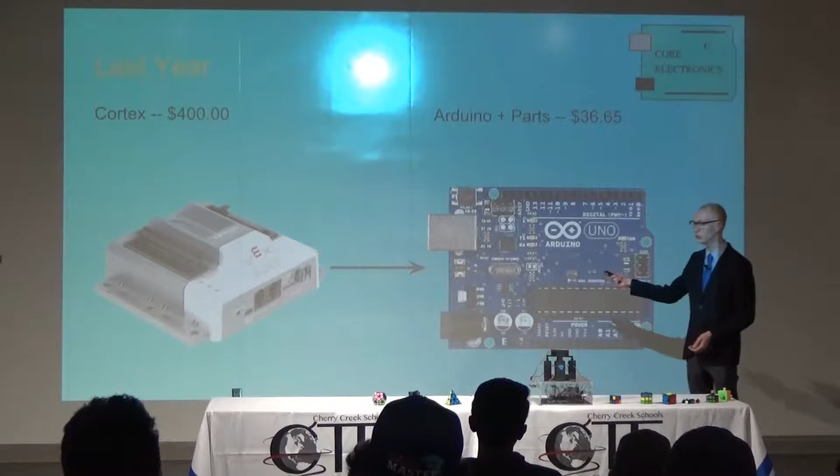But the problem with this part is it's $400, which, as you can imagine, gets quite costly very, very quickly. So what I did instead was I took this part called an Arduino Uno, which is a developer board. It's basically a tiny computer that you can use for prototyping. And this and all the parts you need came out to be around $36, so you can make just over 10 of these for the same amount of cost as it would take to buy one.

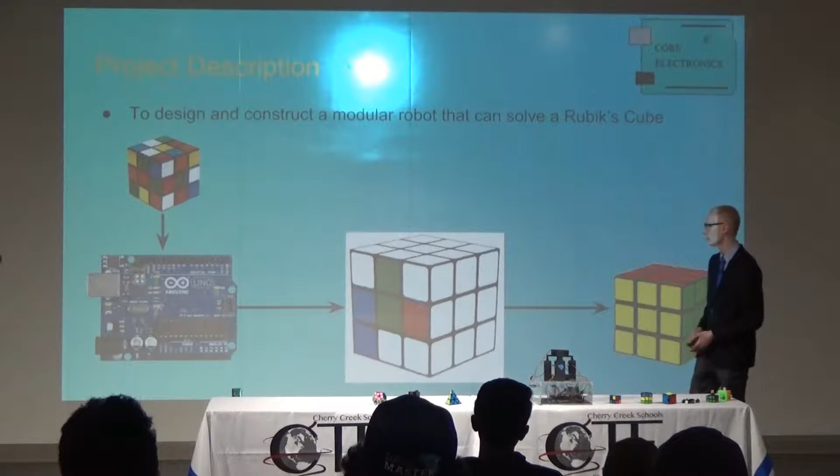My project this year is same sort of thing. I'm still dealing with robotics. What I'm doing this year is I'm taking a robot and giving it the capability to solve a Rubik's Cube, and the result is what you see before you on this table. The way this works is you take a scrambled cube, you put it into my program, it tells motors to spin the faces, and the finished product should be a solved Rubik's Cube.

What I wanted to get out of this was I wanted to keep working on my portfolio, try and get better background, something I can present and say, this is what I've done, this is who I am, you should hire me. I wanted to expand my knowledge of C# programming. C# is just a language in programming, a way to tell the computer base instructions of, okay, take this, now here's what I want you to do with it.

I wanted to be able to design in SolidWorks, and SolidWorks, as you might know, is a 3D CAD program, which I've never touched because I've been on the computer science side, so I wanted to get some experience in that. Along with that, I wanted to get a CSWP, which is Certified SolidWorks Professional. Sadly, I ran out of time and didn't get to take the test for this certification.

I wanted to be able to 3D print custom parts, and that means I can take any idea I have in my head, design it in SolidWorks, and then send it to a 3D printer and actually make it, which seems pretty straightforward, but I'll explain later on in my project. I did run into a few snag-ups with that.

And then the last thing, I wanted to create a robot that can autonomously solve a Rubik's Cube, which I made it so that it can solve a Rubik's Cube, but I ran out of time to add the functionality to make it fully autonomous, which means you just set the cube in there, hit go, and it can do everything. For my project, you still have to give it a couple guidelines along the way.

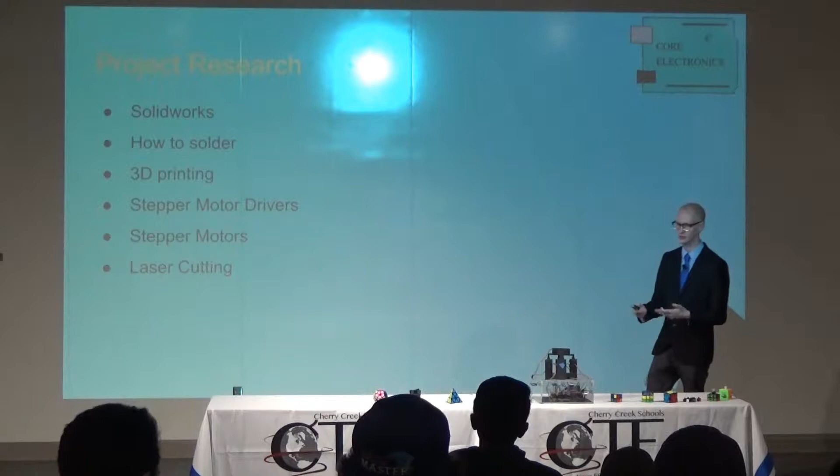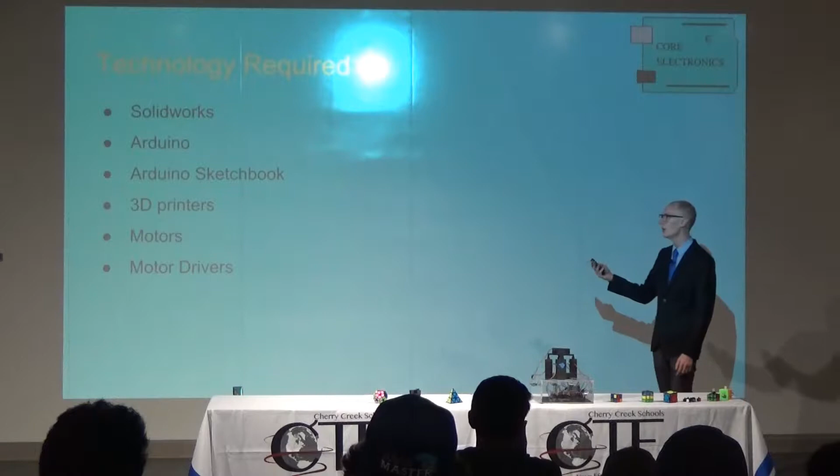And then laser cutting, I've never touched the laser before, so I had to research CorelDRAW and then just learn about the process of actually cutting the material, which I used for the acrylic box that the wiring is housed in. For this, I used SolidWorks, and Arduino Sketchbook. Arduino Sketchbook is the developer environment. It's where you go in to type the actual code on the computer and send it to the Arduino, which is the computer I'm using.

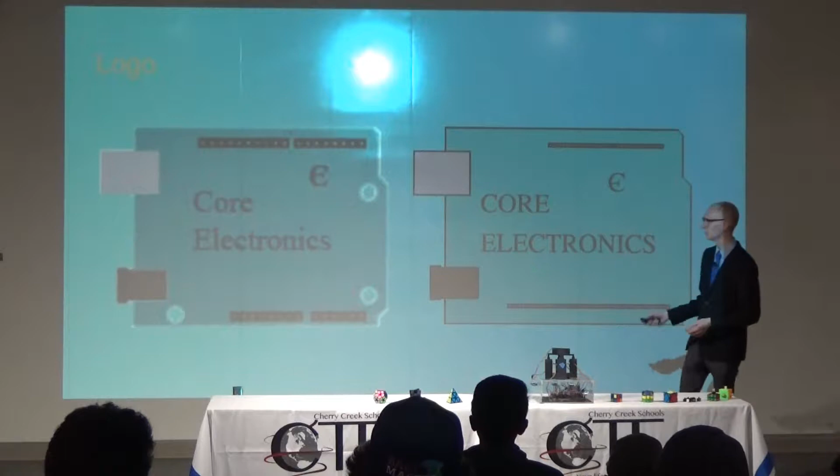3D printers, as I've said before, and motors and motor drivers as well. For our projects, we all made pseudo companies. So my company is called Core Electronics. I have a couple different logos. The one on the left is what I used last year. It's sort of low resolution, so I just beefed it up a little bit on the right, and this is what I've been using so far this year.

Overseeing all of this, I have Brian Hong, who's sitting over here. Thank you for overseeing my project. He's overseeing the code and the hardware parts of my project. He used to teach at Oberlin, and then from there he transitioned to SparkFun, where he worked with educators developing easy ways for students to learn. And then from there he moved to where he works now. He's back in the classroom and he works at Powell High School, which is a technology-driven high school.

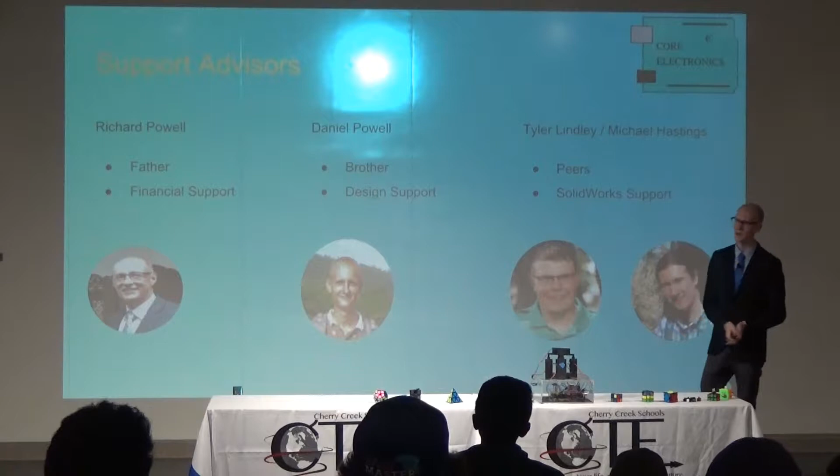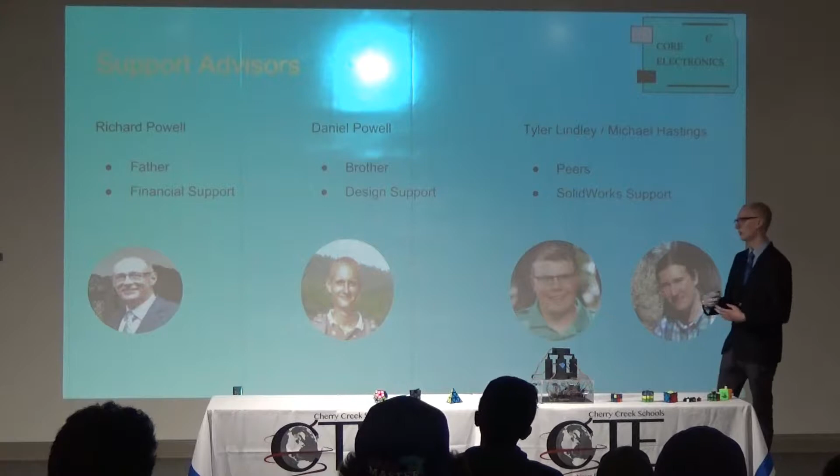For my support advisors, I have my dad. He's there for financial support. He helped fund my project. I have my brother, who's a web designer, and he helped design my PowerPoints and make everything look nice and neat. And then I also have my peers, Tyler Lindley and Michael Hastings, and they were mainly SolidWorks support. They helped me work through the tutorials and snag-ups that I had along the way. They also read through some of my project journals to make sure there's no typos or anything that's worded confusingly.

So for my timeline, we started in October. Before then, we had some introductory work, making our logos, trying to figure out what we were going to do throughout the year. So we started in October. I started mine with just going through the SolidWorks tutorials, getting through the bare basics, so that I knew what I was going to be doing. This took me a couple weeks through October, and then from that I started designing my robot itself.

So I started with a way to interface from the motors to the cube itself, and I did that via these 3D printed parts that sit inside. The idea behind this is you can turn the motor and then the face of the cube will turn. But there's a problem with that because with how this cube is designed, when you turn the piece, you can see it slips past the edges, and then the face doesn't actually turn. So I had to work around that later, and that's how I came up with this. I took a normal Rubik's Cube and I drilled holes in it, and then I put dowel pieces in so that when you turn that, it turns the face of the cube.

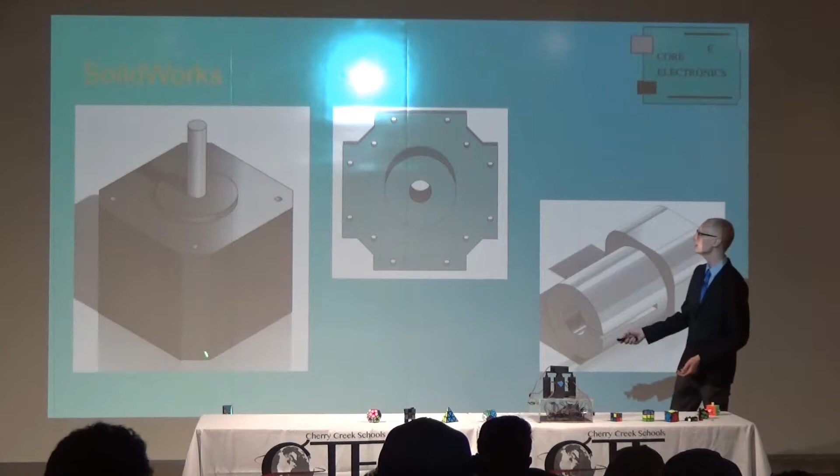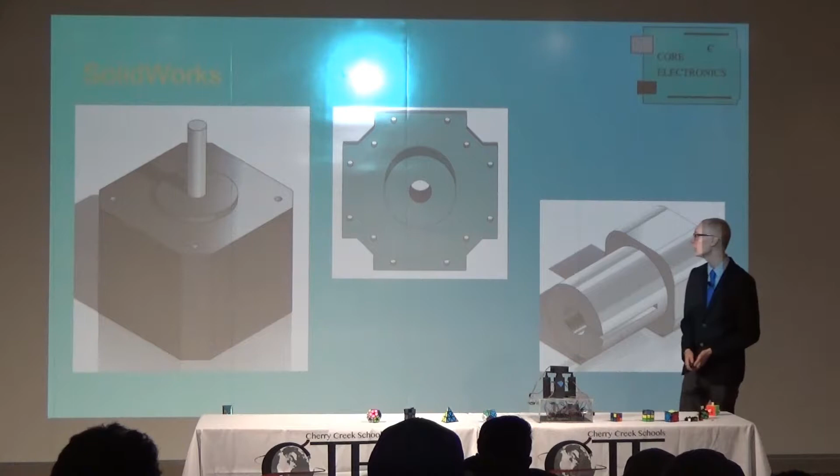For SolidWorks, these are just a few designs I used. This is a mock-up stepper motor that I used, so I knew that when I 3D printed stuff, it would come out correctly. Sadly, I didn't have this idea until after December when I printed about half my robot. So the first 3 or 4 sides didn't turn out.

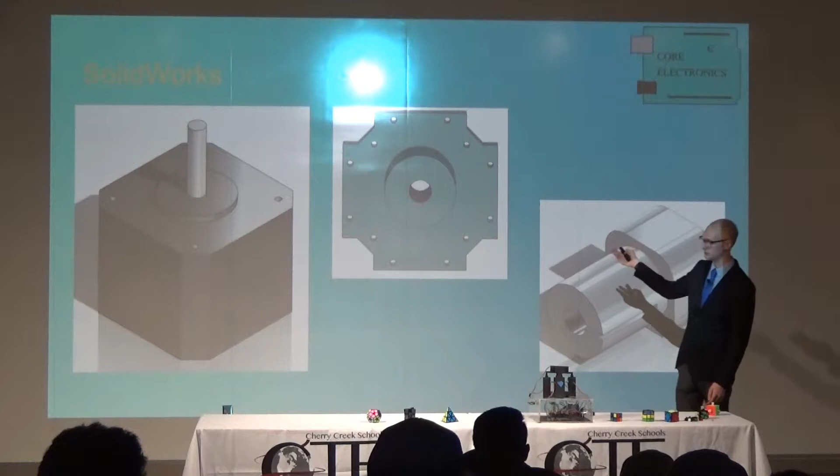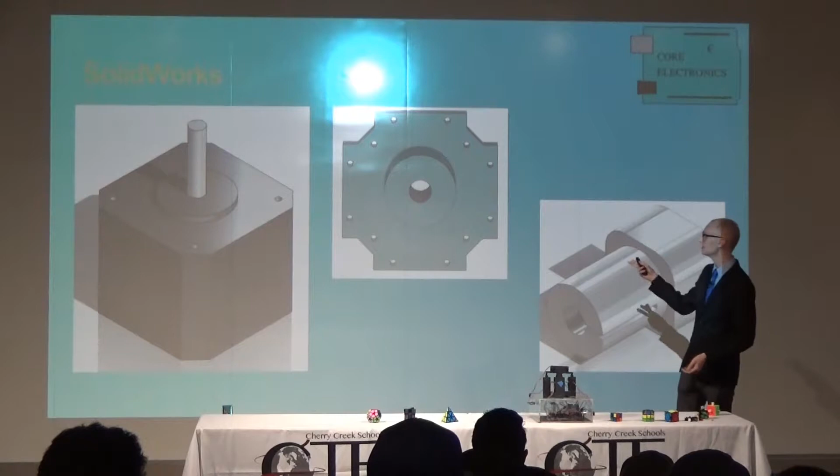In the middle, what you have here is the stepper plate, and that was just a way to secure the motors to the body of the robot because of the tension when the cube sits in there. It actually turns out that I don't need this, and the pressure from the cube will push the motors into the body of the robot without this.

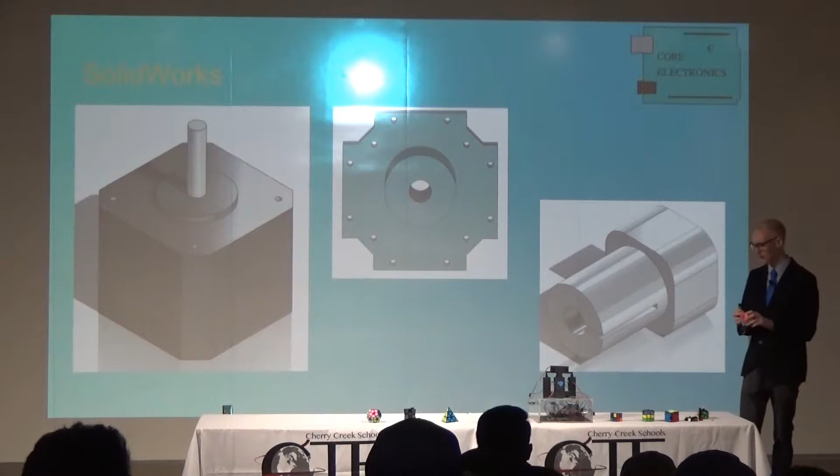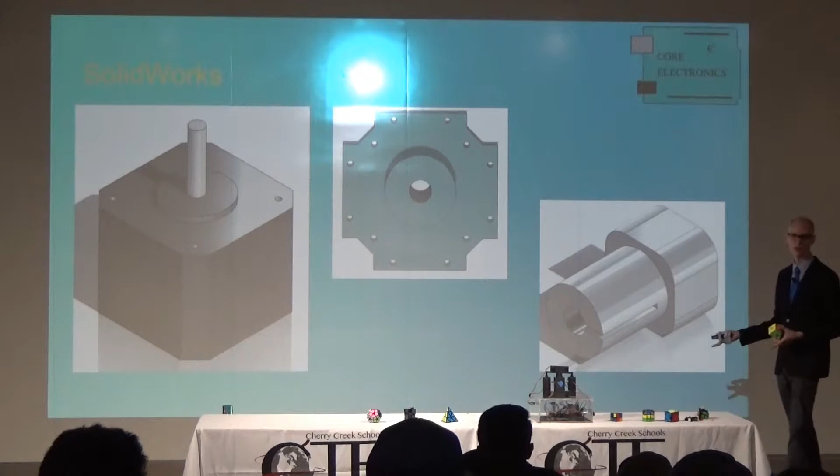And then over here I have the 3D print here, which is a way to connect the axle, which will go on this side, to the cube, which connects on this side. And then one thing about this is there's a slit right here, and the reason I did that was so I could put hose clamps over the end, and when I tighten down the hose clamp, this plastic will actually bend and give it a really secure fit to the axle.

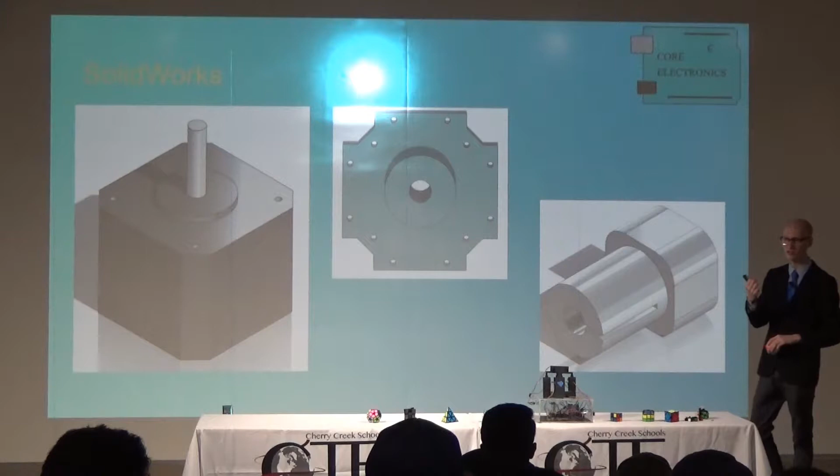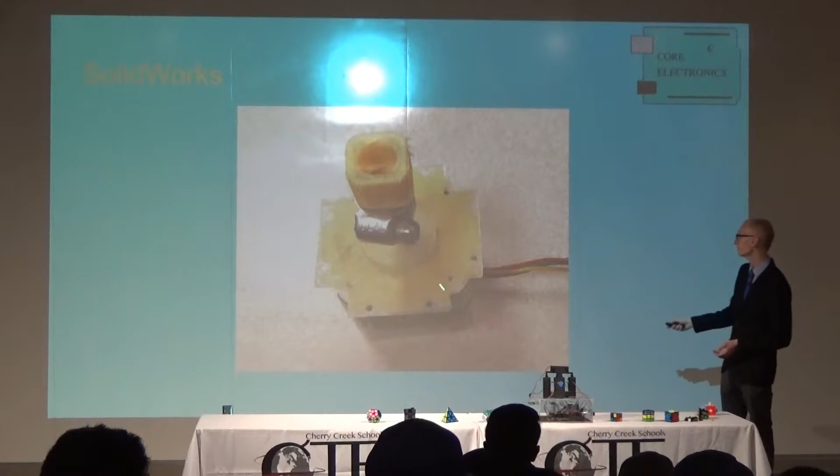This is what all those look like together in real life. You notice it's sort of this weird yellowish color, and that's just because the material that we used in this print is actually Kevlar, and that gave it a lot of extra stability and extra strength, because when this stepper plate came out, it was only a millimeter thick, which is obviously very flimsy and easy to break.

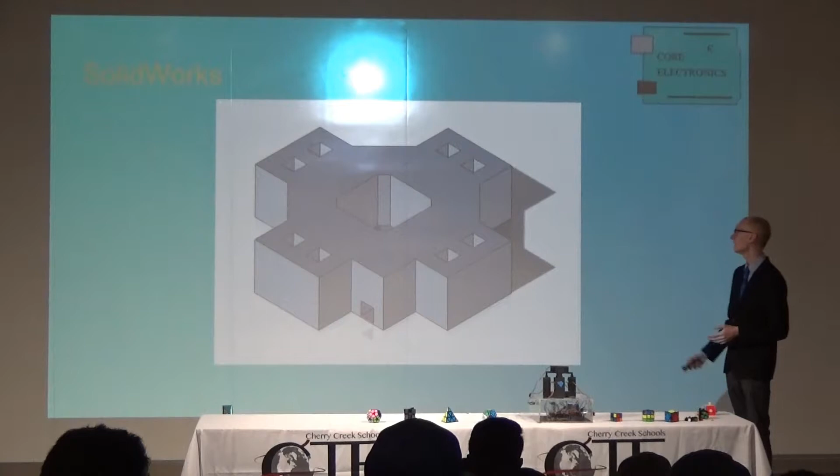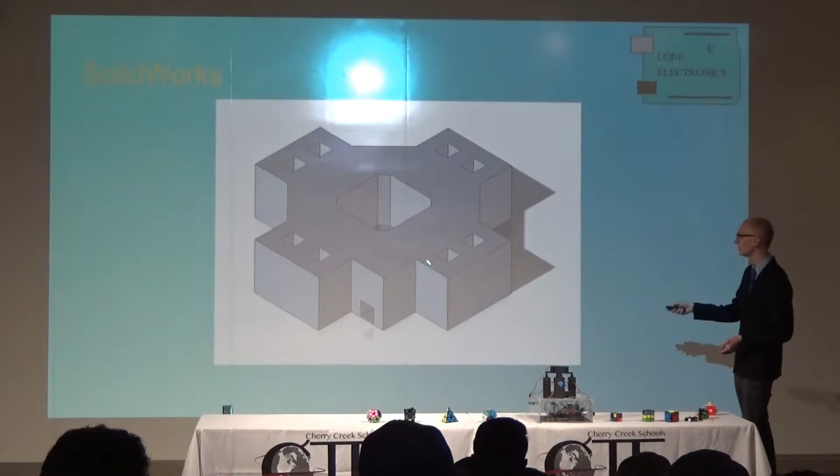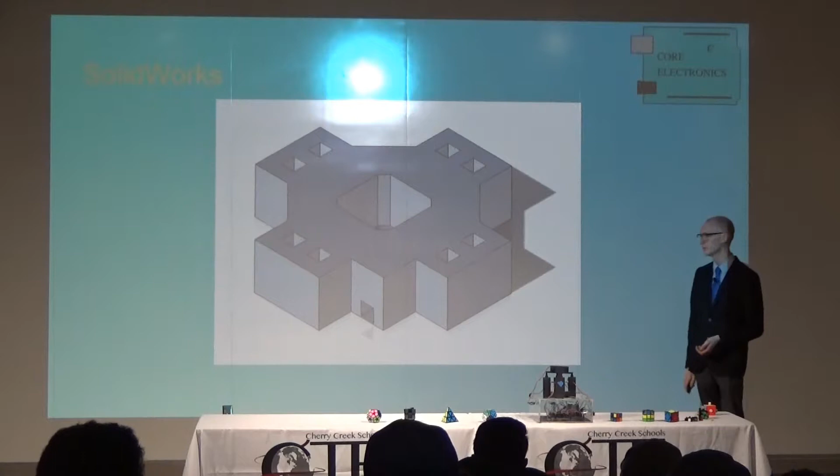This is the base of the robot in SolidWorks. You can see there's a spot to set each of the sides in, and then there's a little tunnel through here for the wiring of the motor that will sit in here to run through, so that there's a spot for them to go and they don't get cut off when you put the motor in there. This is what a motor and the plate would look like all together.

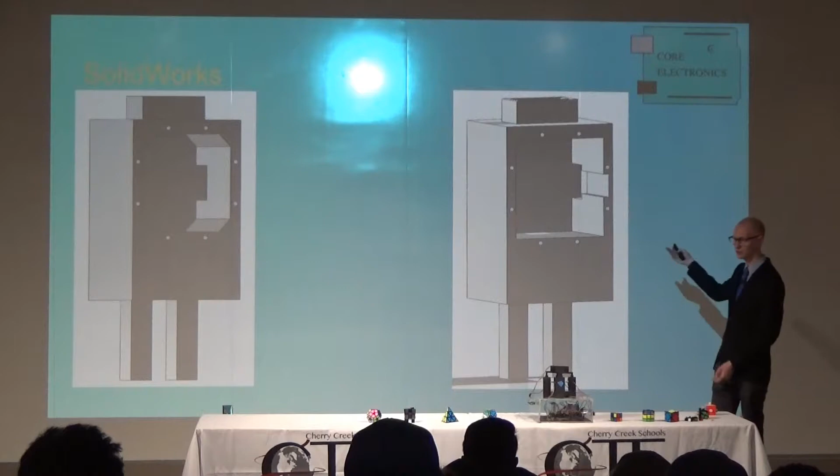From there we have the sides. This is the first idea. This is what I used for 3 of the sides. And there's a couple problems with this, namely the chamfers, which are these angled cuts on the sides, don't really give the motor enough spot to sit in there and slide in and out easily. So to address that problem, I just took them off in the next design, which is what I used for the last side. And then the other change I made for this as well was in here.

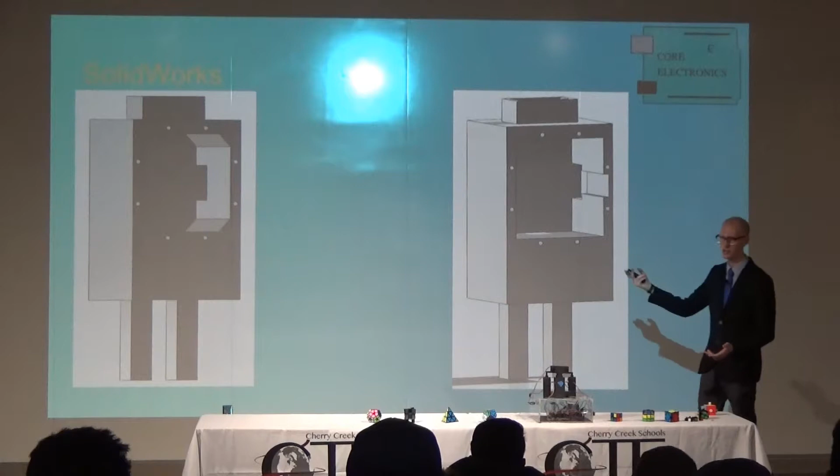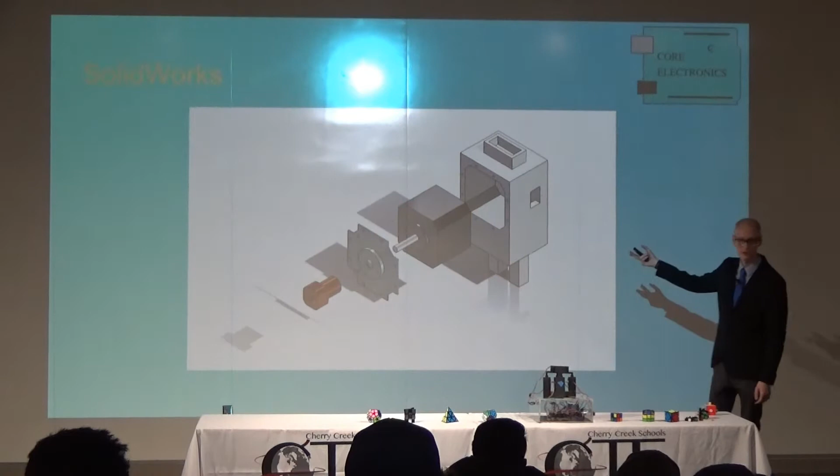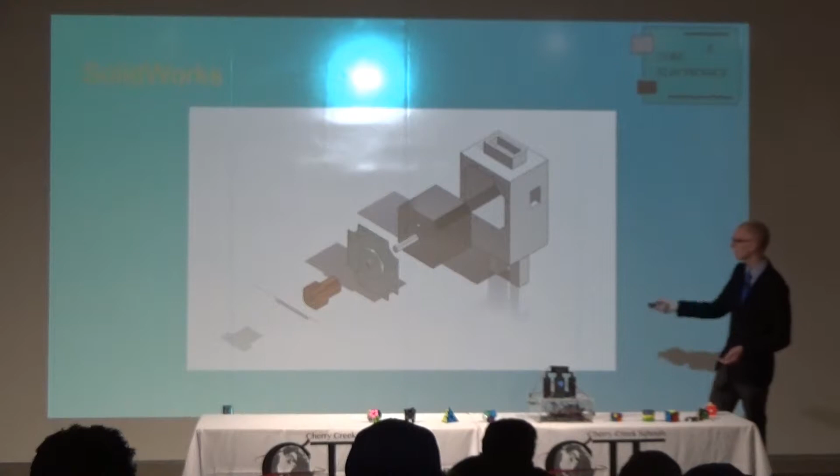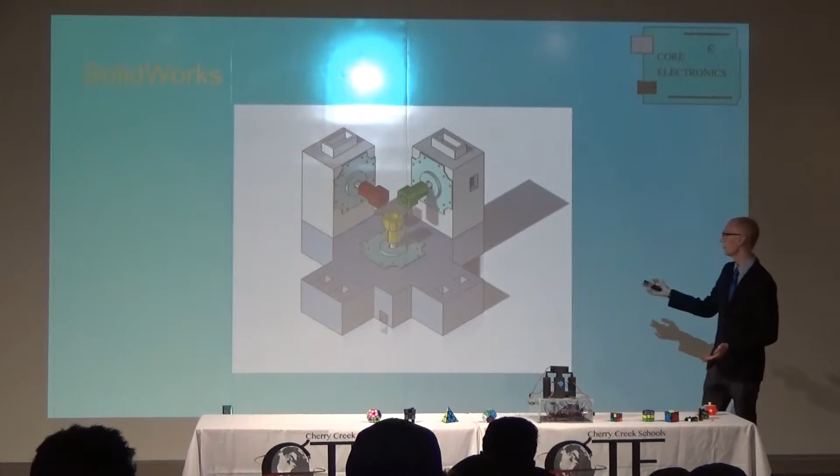Over here, there's now a slot right there, and what that channel does is it just lets the wiring slide in and out with the motors, so they're not getting cut off when you try and put the motors in. This is an exploded view of what the side would look like. So you start with the side, which these pegs right here would fit into the bottom, and then into that you have a stepper motor, and then over top that you have the stepper plate and the connection to the cube. This is 3 of the sides, so the bottom, the left side, and the back. It's just a model of what it would look like if it's put together, which it is.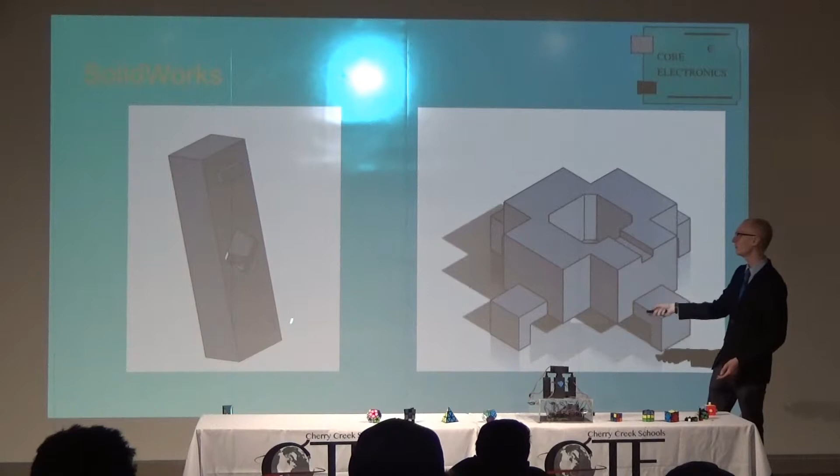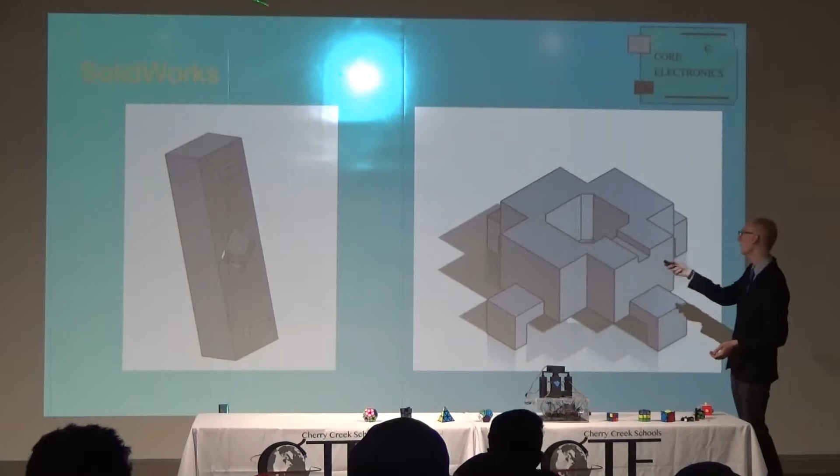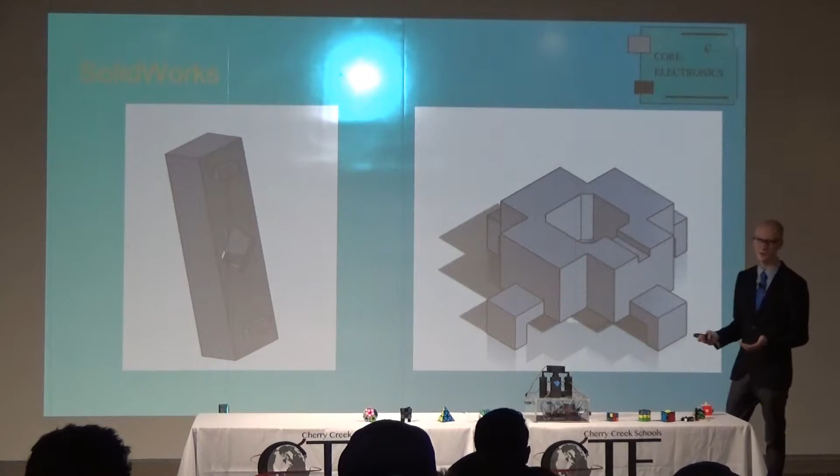This is a couple design ideas I had for the top of the robot. So I started off with this beam idea that it would rest on top of just 2 of the sides and sit in there. And I ended up scratching that and going for this more 4-legged design, mainly just so it's more symmetrical. I think it looks a little nicer. Between the 2, they would both work fine. There's not really any functionality differences.

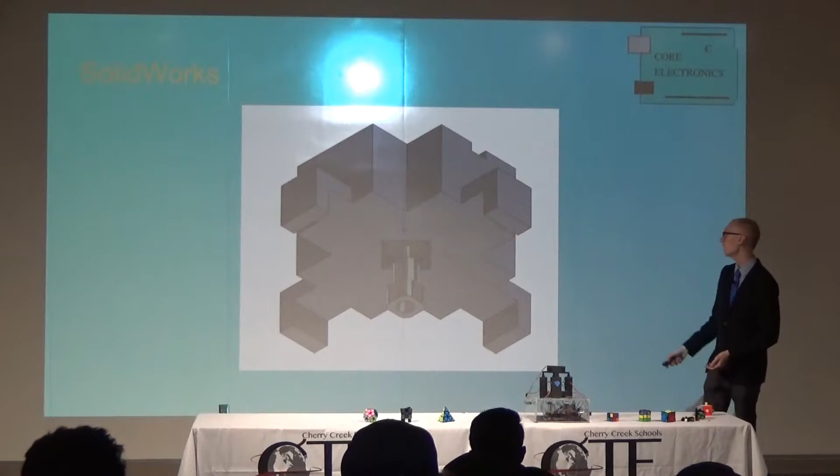This is just a view with the motor in there. So you notice it doesn't have the stepper plate. I just put holes inside the top, and that's just so I could screw it down, make sure it's really stable in here, and the motor's not going anywhere.

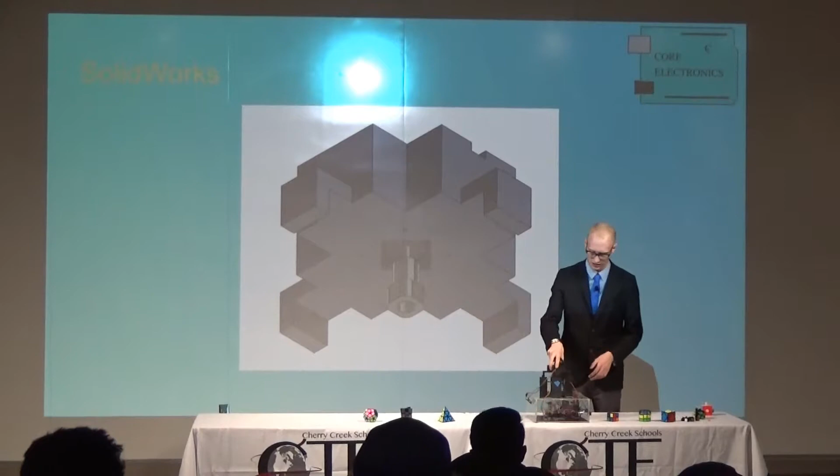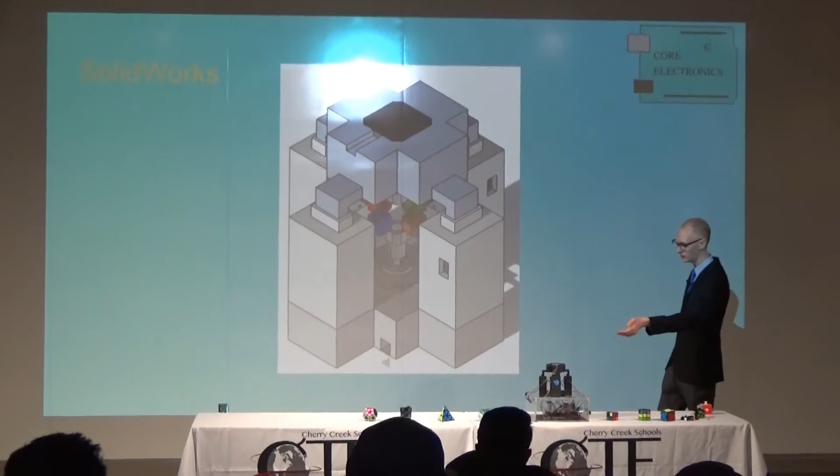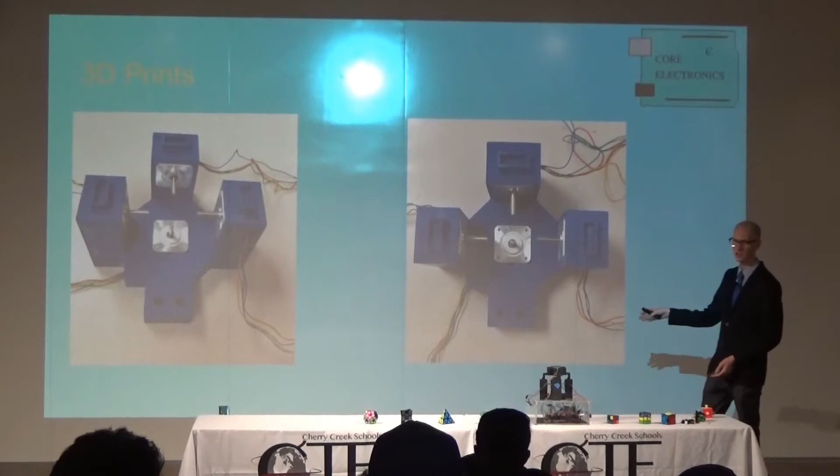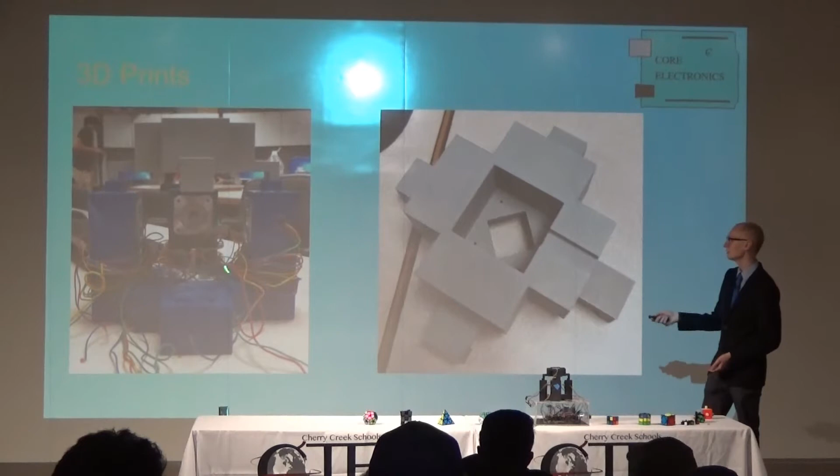This is a complete assembly in SolidWorks, and after I 3D printed it, it's what you see in front of you. When I 3D printed it, initially there were a few problems, so you can see little cuts that I made with a Dremel tool to make everything sit together. After that was done, I printed the top and the front, which isn't in there. You notice the mess of wires, which is why I made this acrylic box.

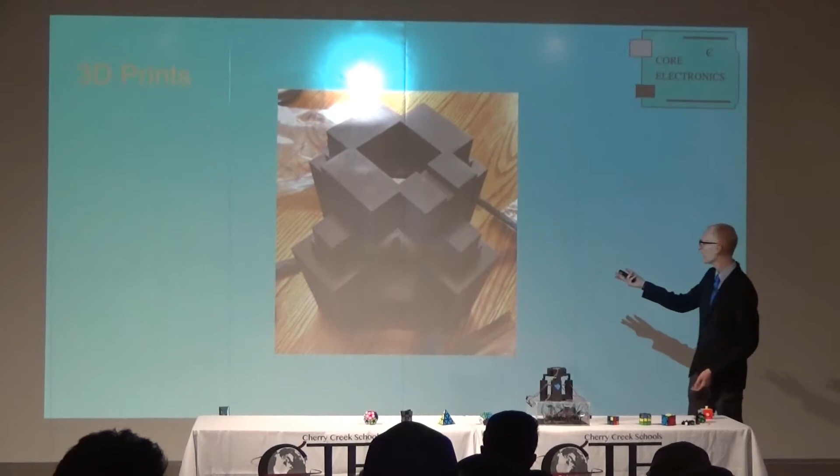And then the last thing with that is I didn't really like how most of it was blue and other parts were gray. So I put in the last side and then painted it black so it was all the same color, and it just looks nice and sleek compared to how it was before.

Before we jump into the code, we should go over notation. There are 6 sides of the cube, and each face can be represented by a letter. The left side will be represented by an L, upper will be represented by a U. Similarly, B will be back, F can represent front, D can represent down, and R can represent right.

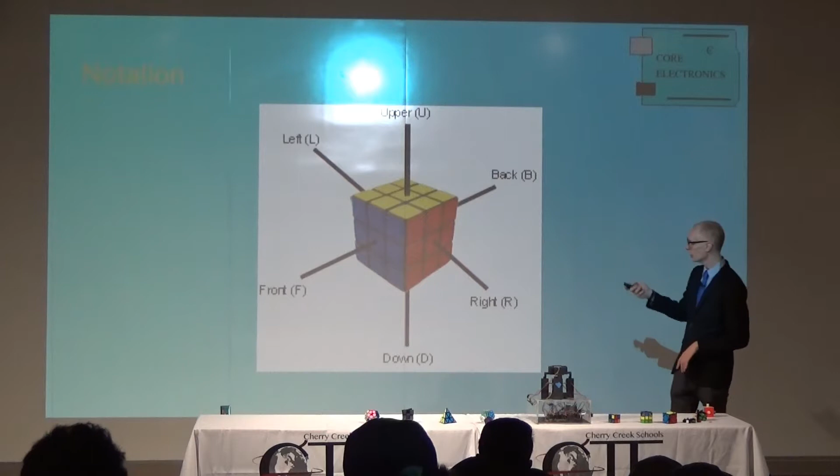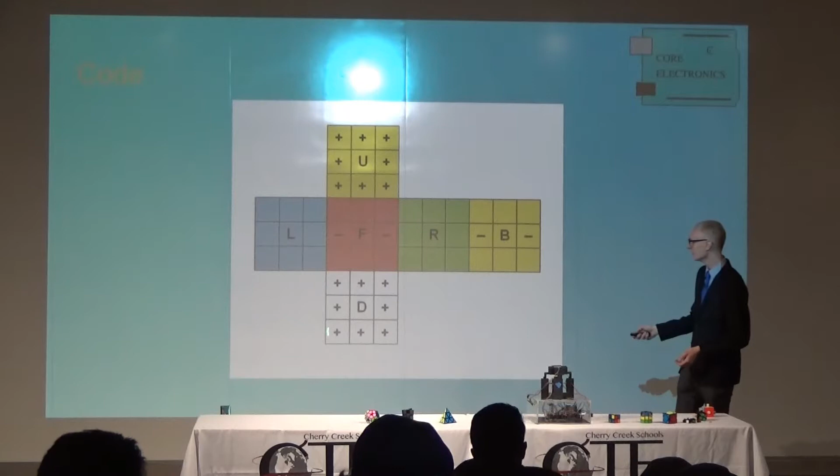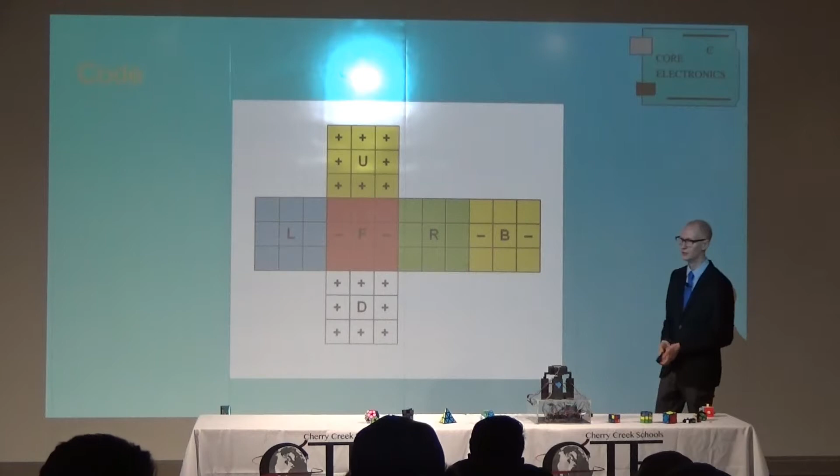For coding, it's really difficult to make an accurate 3D model. So instead of using a model like this, we can unfold the cube, and that gives you something like this. You have U on top, L, F, R, B are the sides of the cube, and then D can be on the bottom because that's just how it works. And then there are these pluses and minuses on there. You don't really need to know what this is. This is for more technical Rubik's Cube. If you're into the Rubik's Cube, you can probably figure it out, but we don't have to get into that.

So how my code works is it takes this website, which I actually have right here. You go into this website and you go for each spot on the cube. For example, this one and this one, all of these ones are yellow, and then you might have some red ones in here somewhere. When you finish doing this for all of the sides on the cube, you can click down here solve cube, and this will spit out an algorithm, which is the F2L method.

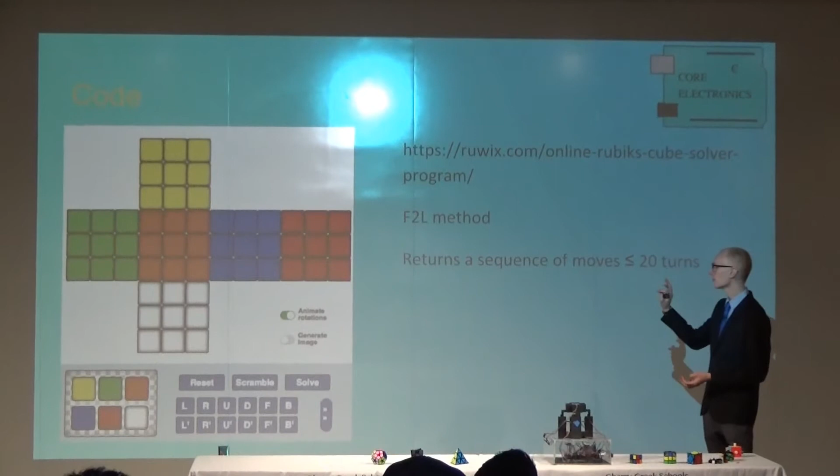It's just a way to solve the Rubik's Cube, and what you need to know for that is no matter what the configuration of the cube, no matter how messed up it is, it will always return a sequence of 20 moves or less to solve the cube. This method is really efficient. It's what most of the fastest cubers in the world use, and it helps to make my robot a lot faster as well.

So it takes that sequence, and then it goes into my program. You have to manually input that because I ran out of time to make it autonomous. And then my program will break up the sequence and send it to the stepper motors, which will turn however the sequence tells them to. And when that's done, you get a finished Rubik's Cube.

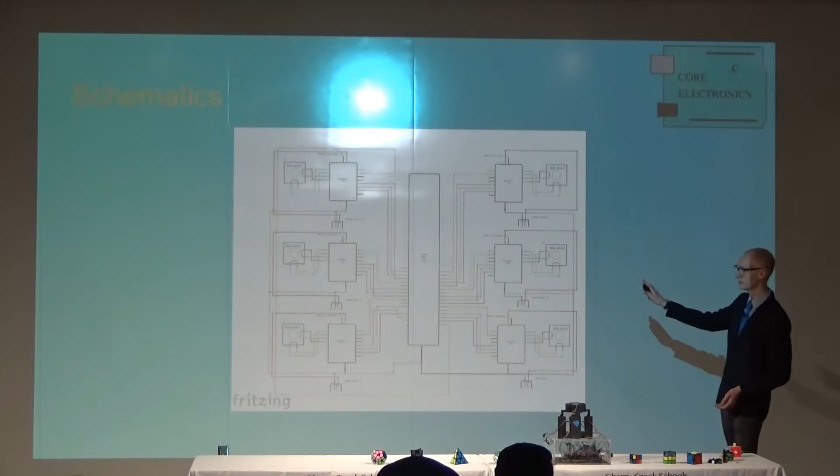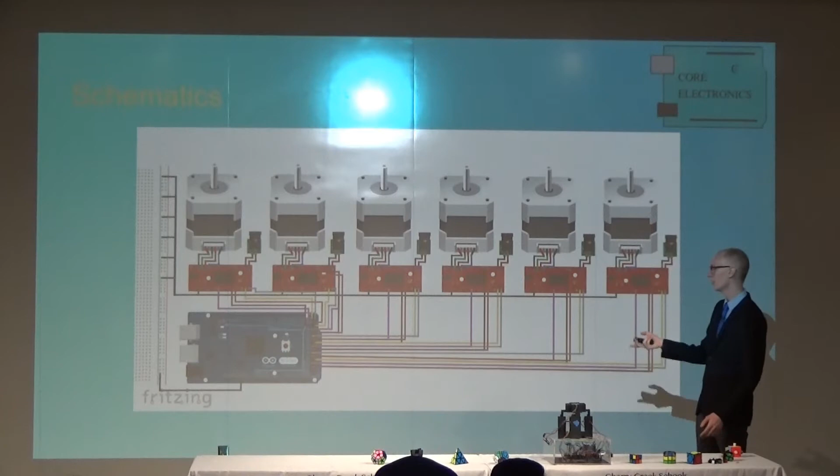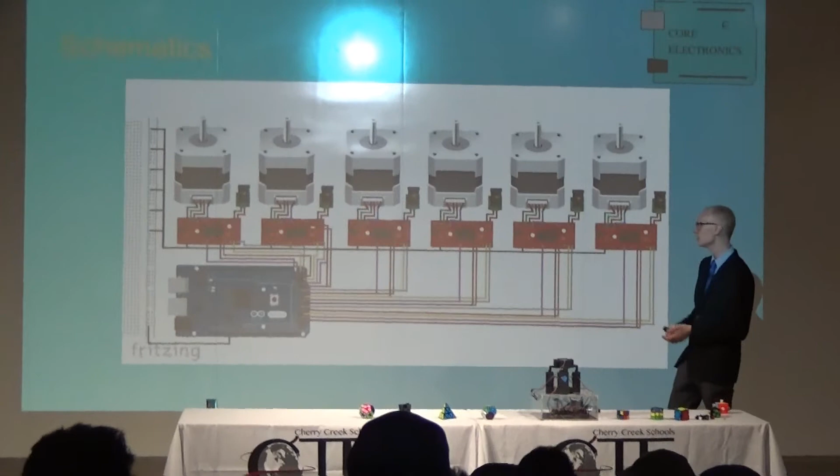This is what some of the schematics look like. This is a little complicated, so we're going to switch to this view, which makes it a lot easier to understand what's happening. It all starts with this Arduino, which is called Arduino Mega. I use this Arduino specifically because it has a larger computer chip, which means it can do a lot of operations more rapidly. And I'm also controlling 6 different motors, one for each face of the cube.

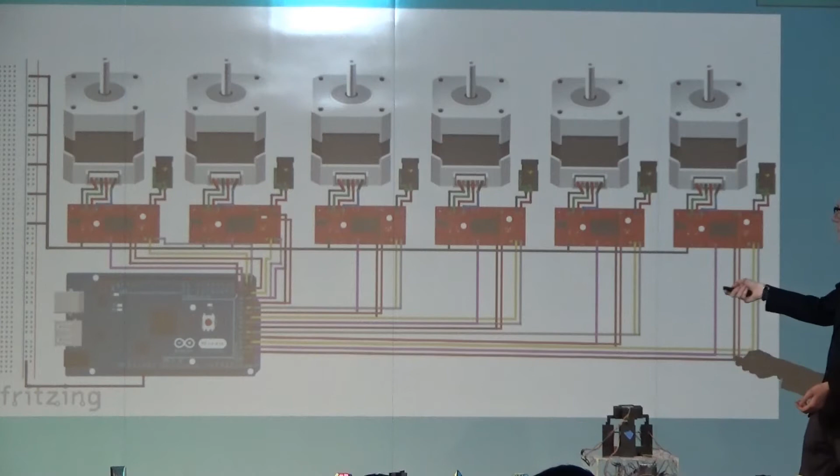So it starts here, runs the program, and based off what the program I wrote tells it to do, it will send out signals to any of these 6 stepper drivers, which are connected to the motors. And then the signal goes through the wires and makes the motors turn.

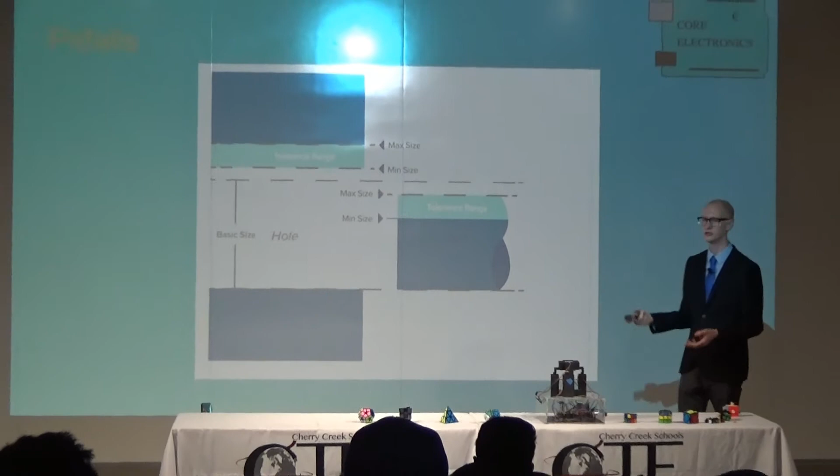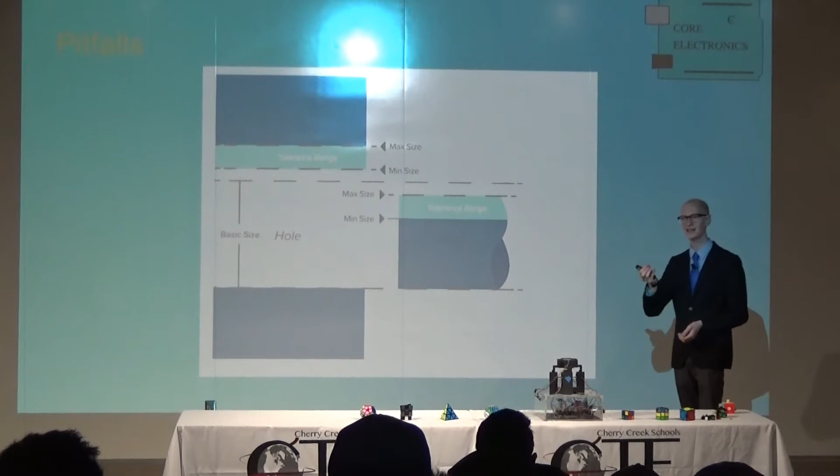Along the way, I had a couple roadblocks. The main one was 3D printing. 3D printers by nature are not exactly precise. You can say you want the material to end somewhere in here, but the motors in the 3D printers won't land exactly there 100% of the time. So what you get are known as tolerances, which means the material will land slightly on either side of that. So you get a max size and a min size.

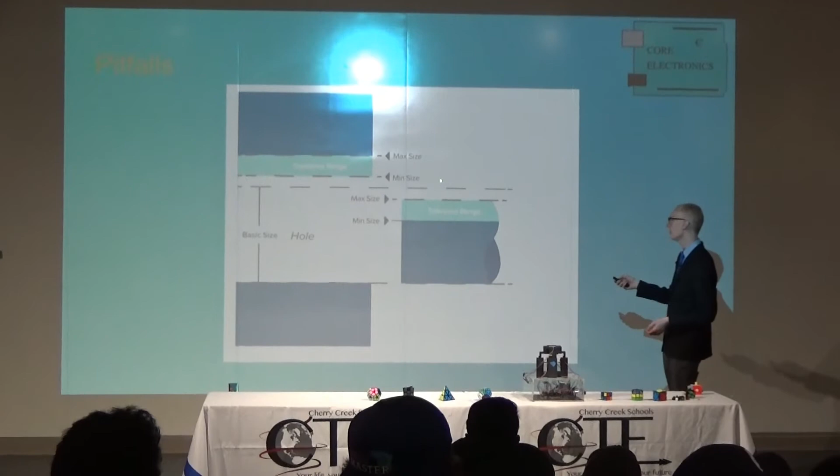In this example, you have something similar to what I was doing with my shafts. It will slide into a hole with a little gap in here. But what I ran into, instead of making a gap right here, I put an exact fit so that it would line up perfectly, and I forgot to compensate for tolerances. So instead of having this max size and min size, what happened was I had a max size that overlapped with this minimum size.

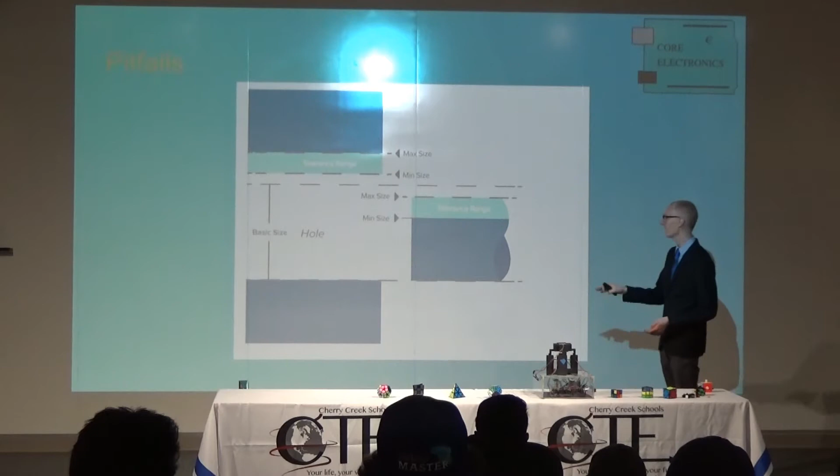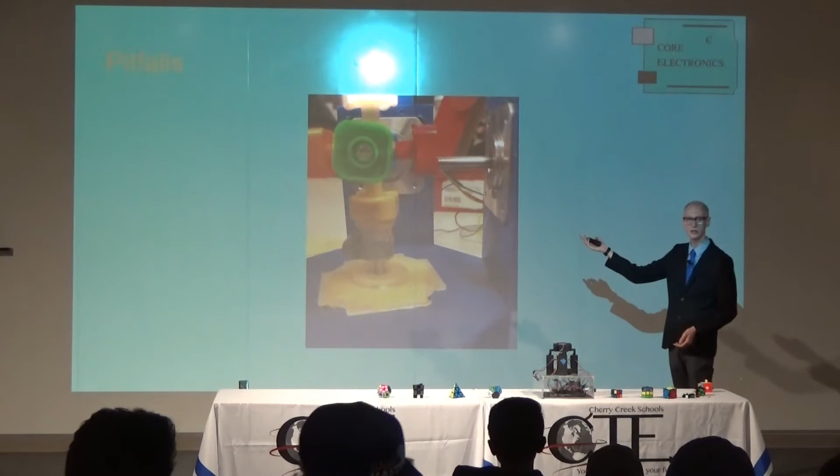So I had to shorten down the shafts and widen the holes so it would fit together properly. One of the other things, this is also due to tolerances, the cube didn't line up properly when we first tried to put it in there. And so how I fixed this was I just drilled a hole through here, and that let me set the bottom's height so you could raise and lower that motor to cube connection however high you need it so that the sides will line up.

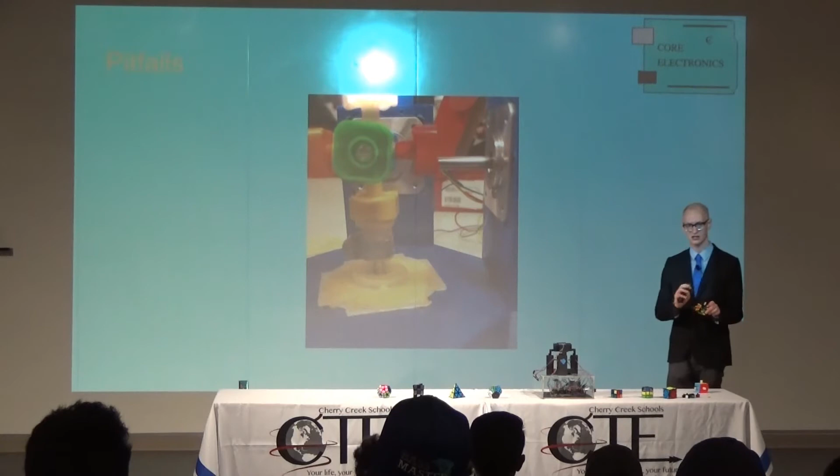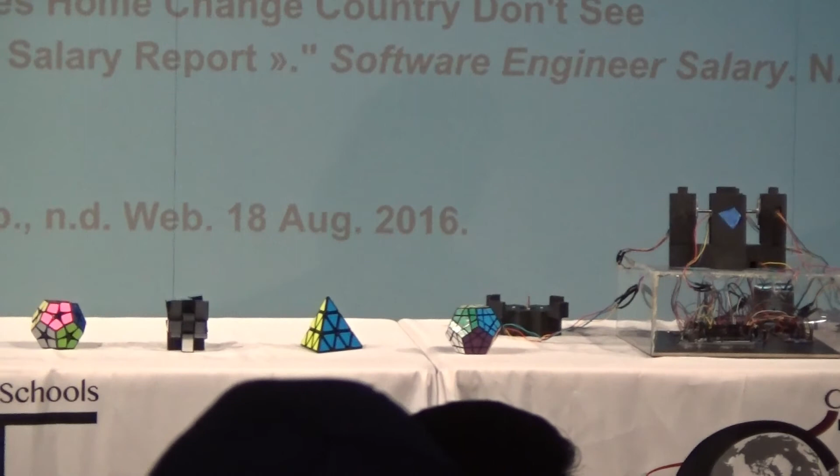What other applications could you envision for this? So I made this specifically for the purposes of solving a cube. But if you wanted to, you could redesign it for these different shaped cubes. And so that would just take more time designing in the 3D CAD program. And then with that, you would also have the modular ability, which is taking in and off different motors, so that, for example, over here we have a 12-sided Rubik's Cube or a 4-sided Rubik's Cube. You could use the same robot in just a couple minutes switching between.

Yeah. You're going to keep working on this, right? Just to make it work? Yeah, I'm going to work on it over summer, just to see if I can actually get it to work. And then I'm thinking right now it might be a project that I come back to in the future when I finish studying through all my stuff in college. It will be a fun project to come back to.

Anyone else? How long does it take you to solve a Rubik's Cube? It depends on which one you're talking about. For a normal 6-sided Rubik's Cube, that's a 3x3, so not a small one like this, this is a 2x2. A 3x3, my fastest time is around 1:15.

Yeah. If you put one in, actually, no. So the motors can spin, but the problem I'm running into right now is, again, with the tolerances in mind, I didn't take that into account when I designed it. So we're having difficulties actually fitting the cube into the robot itself.